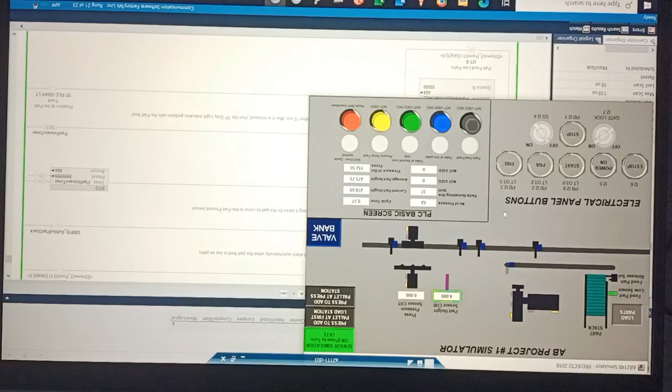When the gate lock is on, we can press the power button and the start button, and the process starts. The first function I gave is for detecting a fault in the part stack feeder.

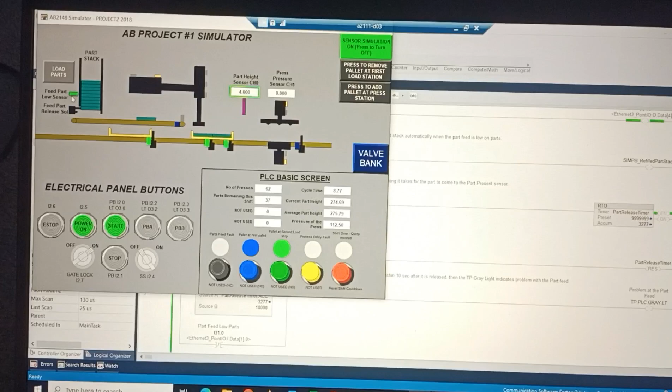Here, I gave it as automated so that when this turns off, the feed part low sensor turns off, it automatically restocks. If it does not restock after the part is released and it takes longer than 10 seconds, the fault light turns on, which is this one.

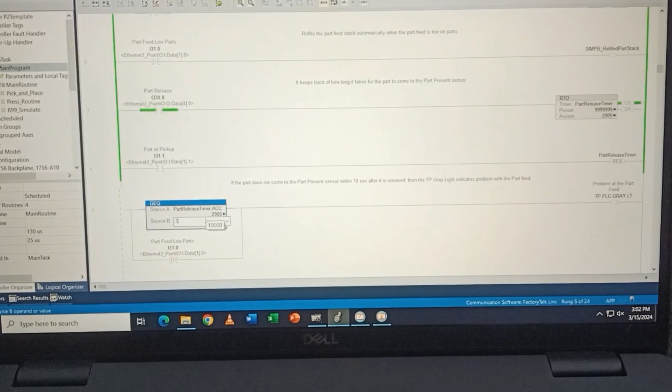I can demonstrate it by changing this 10 seconds to 3 seconds. I gave it as 10 seconds because it usually takes around 5 to 6 seconds for the part to reach here for the part pickup.

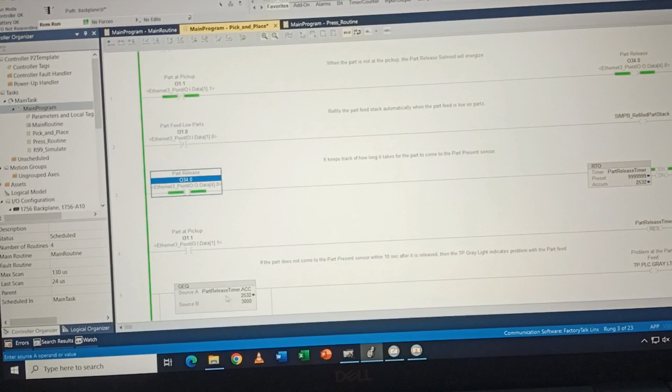You can see here it takes more than 3 seconds and this light turns on, and when it reaches here the light turns off. So I'll change it back to 10 seconds.

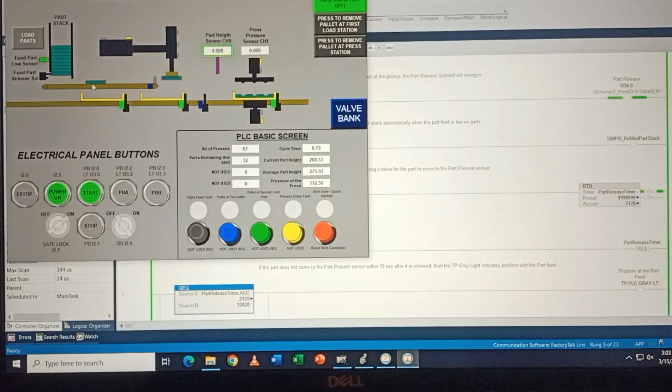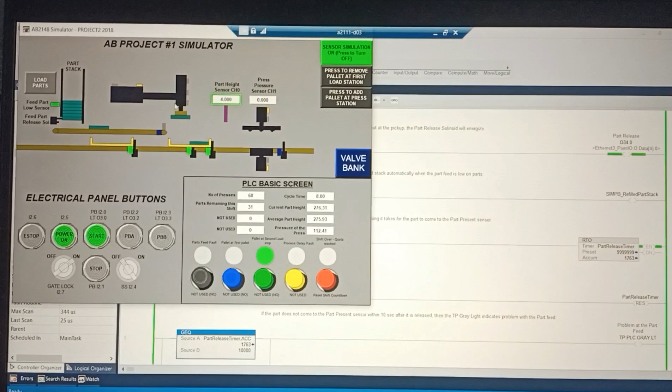Now the second function I gave is for the retraction, horizontal retraction and vertical retraction. I gave them both timers so that I can delay the process whenever I want. According to the time given here, I gave very little time, like 250 milliseconds, so that the process takes much faster than if I give a higher number.

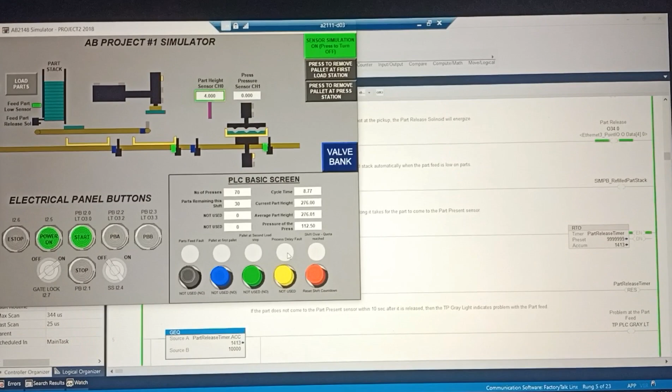Now the third function I did is for the faults here. If the pallet stays here for more than 20 seconds, this process delay fault yellow light will blink, turning on and off continuously. So whenever any part gets stuck here, we can see that.

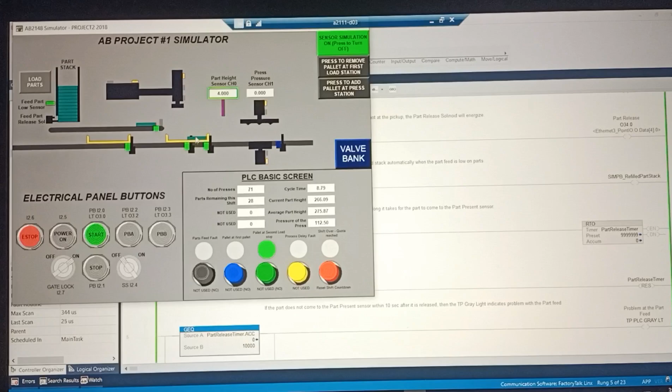I can press e-stop. When the part gets here, I'll press the e-stop. Now, as you can see, it's stopped here, and when it crosses 20 more seconds, this yellow light starts blinking.

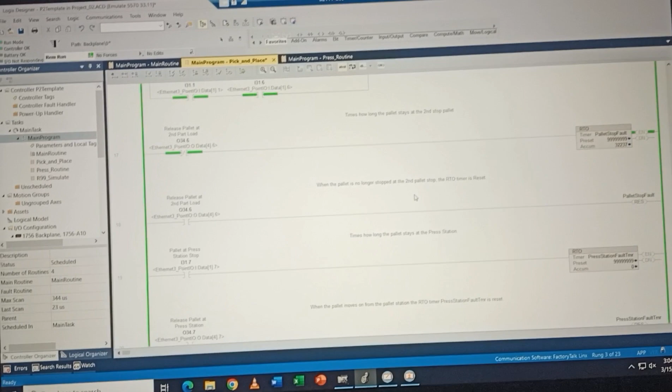As you can see, after 20 seconds, it's blinking. Now, when the e-stop is cleared and the process starts, as soon as it crosses this point, the light will turn off.

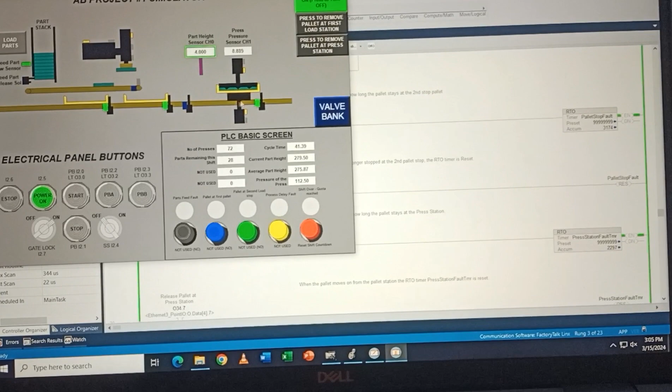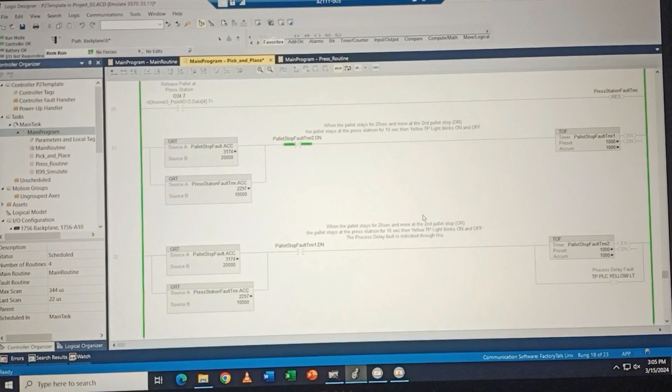And if the pallet stays for longer than 10 seconds here, again this starts to blink. Oh, I should have pressed it. As you can see, it was longer, so it starts blinking.

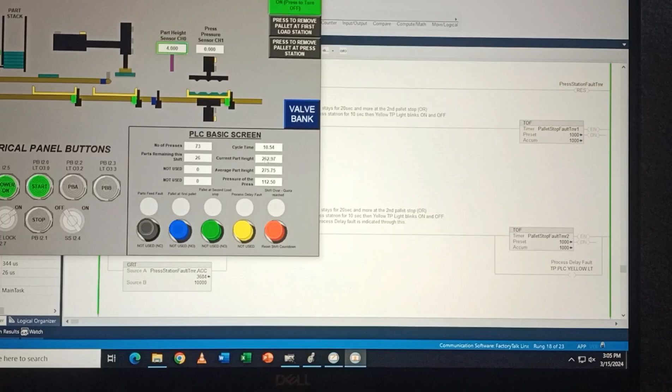Now another function I gave is the height calculator. Here it stores the current part height, and it does an average by adding this part and the next part, this part and the previous part, and also the number of presses, number of parts passed here, number of pallets passed here.

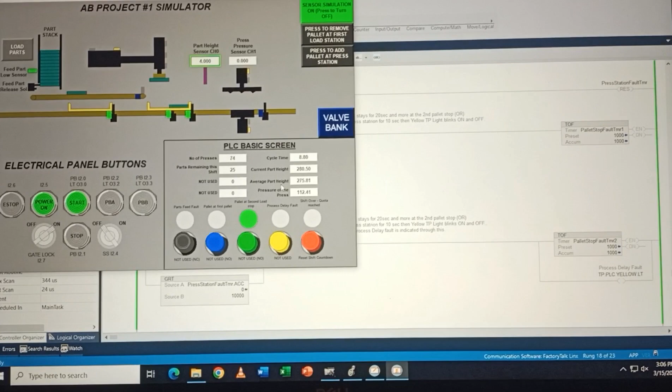That sum I just gave it as... I did not show it here because we don't have any more real number displays here. I also calculated the pressure here and displayed it, the pressure of the press.

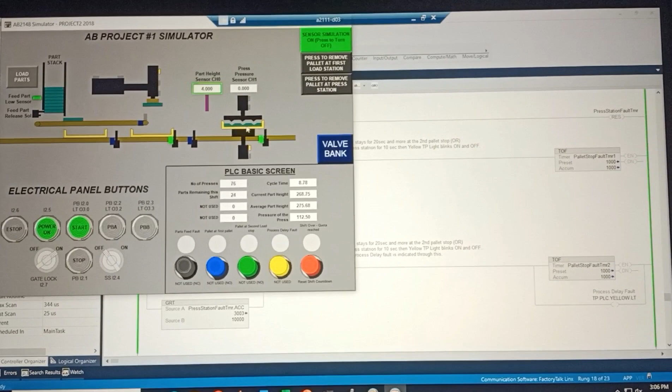As you can see, I delayed the process for the required pressure and gave timers for both of these presses. So it stays on and presses for approximately 2 seconds, I think, and after 2 seconds it releases.

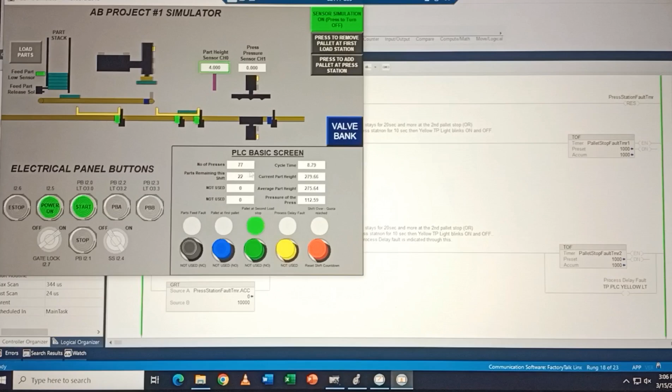And here it records the number of presses, or number of pallets crossed here. And in Int 2 here, parts remaining this shift, I gave it as 50, using a countdown and set the preset as 50.

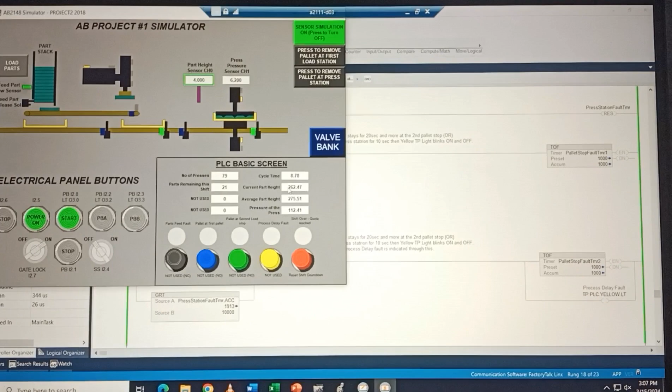So when it reaches 0, it indicates that the shift is over and you've reached the quota, and we can reset it here—if you press it, it automatically resets. See, it came to 50.

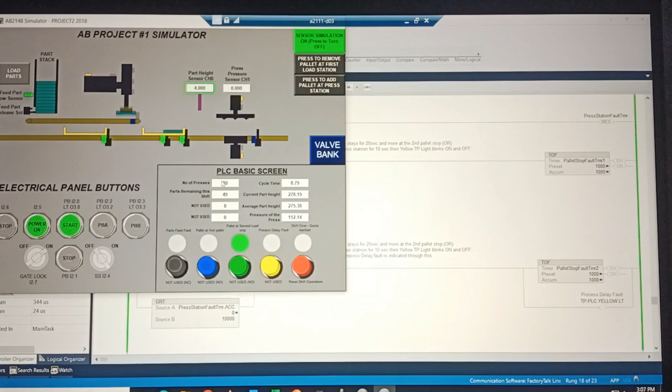And the number of presses, when it reaches the preset amount, which I gave as 400, indicates that it's time for maintenance of the press, shown through this light. After the maintenance, we can just press this button and it resets back to 0.

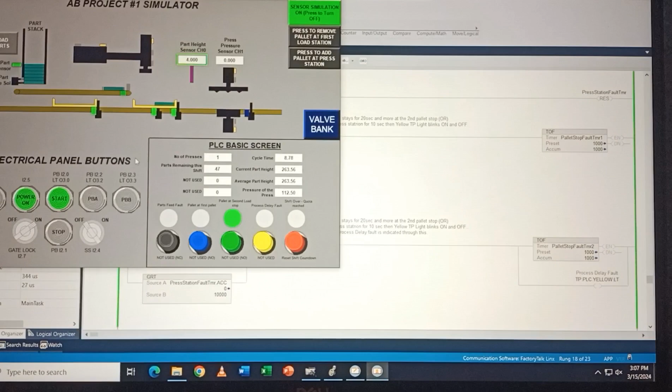Yes, these are the functions I did. I did not use these two integers in the touch panel, and I renamed all these things. I haven't used these 4 push buttons, but I used all the lights, this and these lights as well.

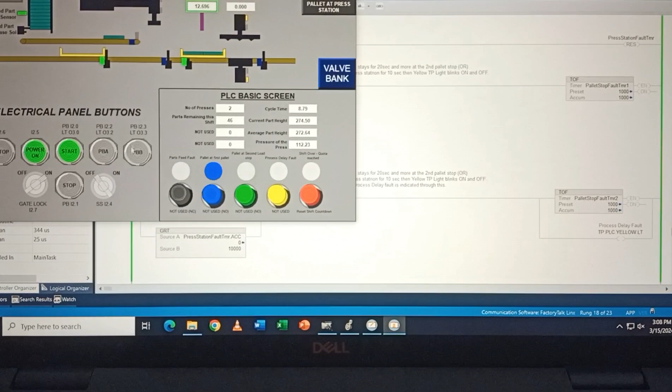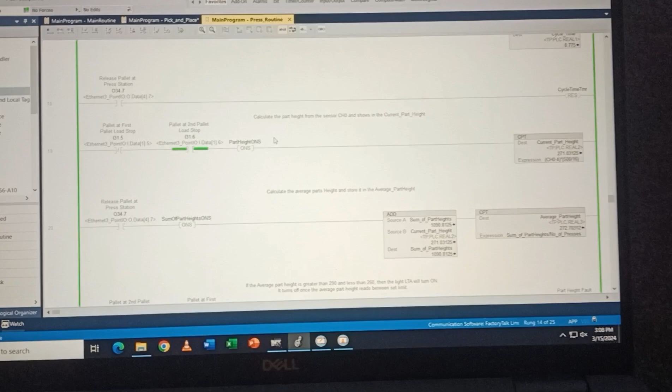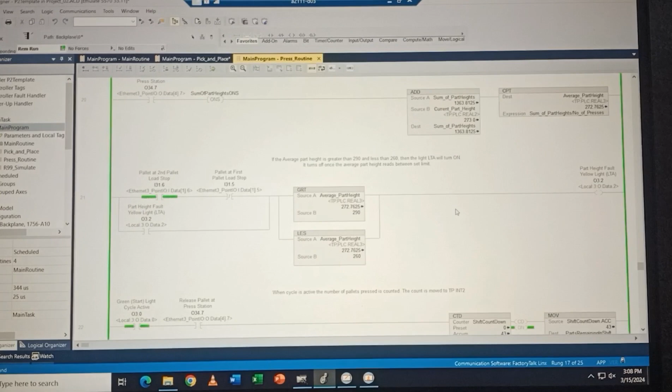I used count up and count down and all the timers—timer on, timer off, RTO—and I also used the compute function in 2 places, here and here, to convert those values into PSI before displaying them, and also used divide and multiply in a few places, and I used greater than and less than to calculate and compare the height.

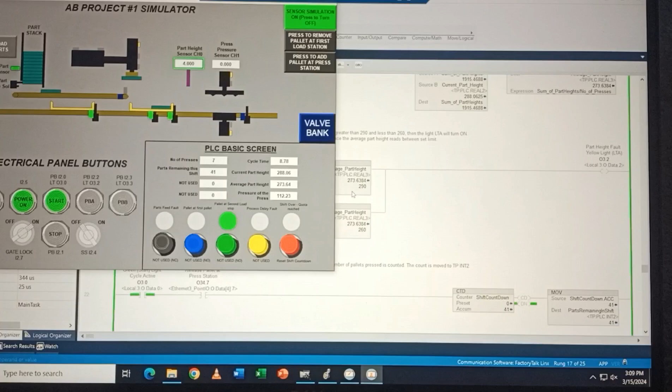I gave it as 290 as the upper limit and 260 as the lower limit. So as long as the part is within these two numbers—as you can see, it's 273 average right now—it indicates the part is good. If the part is bad, it will indicate on this light here, LTA.

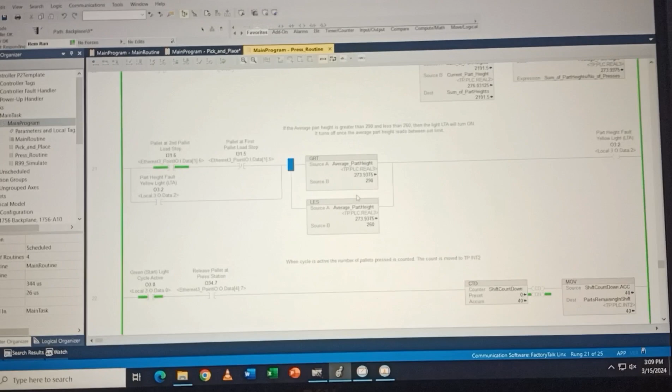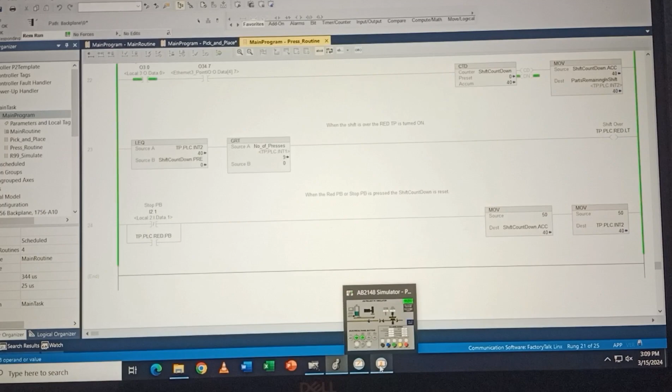And I also used less than or equal to and greater than for calculating when the shift is done, so that I can turn on this light when the shift is done. And that's all. Thank you, Professor.